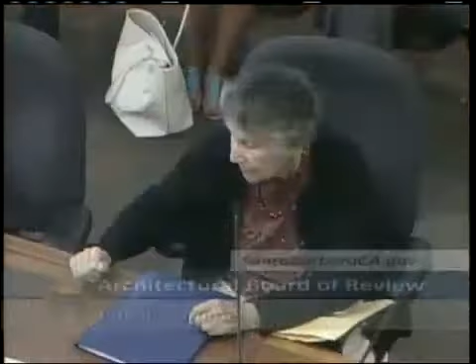Okay, thank you very much. Thanks for bringing in the examples especially. Would you like to keep those? You're welcome to, or I can take them away. I wouldn't mind keeping them personally. Do you mind? No, that's fine, I can always print out more. Thank you, Sheila, I'll keep it in my ABR binder. Thanks very much, Sheila. Should I fill out a form? No, we know who you are, we know where to find you.

We'll close public comment and go on to the approval of the minutes for the Architectural Board of Review for April 25th. We've reviewed all the items except for the last one, and we asked board members to review the video from that meeting to help us summarize the comments, because it's a large and important project, and there was some confusion in the minutes as written.

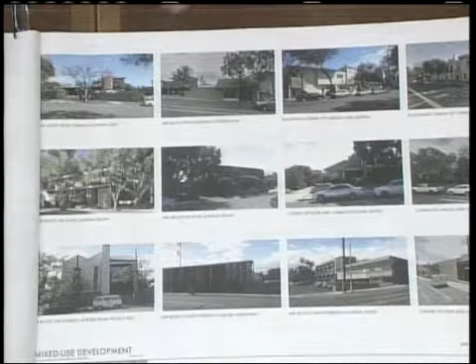We've got some adjacent photos - there's a project around the corner that we did, and several other photos of the block. Once again, this is that one block where if you really took a count of all the various types of architecture there, it's predominantly mid-century modern, including the old state building, which has the big parking lot beside it.

Just so you know, board members were requested to do a site visit before today's meeting. So you guys have been up there? Yeah, okay great. So here's the site plan.

The voluntary merger is to, this is all under one ownership now, but it's to eliminate this property line so that the whole thing will be one property, which allows us to use the entire site to project the density of the AUD units. This is the building that we're proposing to remove.

So we got to go to the site plan. That's the vet's office, is that correct? Right? Okay, correct.

So this is turned to fit on the sheet here, but anyway, so here's - oh yeah, I'm a little bit confused. Carrillo's right. Yeah, Carrillo. Let me go back to this other one.

This tells the story better. So there's about a story of level change across Carrillo right here, so that there's actually tuck under parking that you saw along this edge. So this is a surface parking lot that's up higher, and this will connect across the courtyard into this courtyard, which is the residential, where the residential units start.

If you go back under this driveway, you'll basically be going under a tunnel, if you will, over this courtyard down below to get back to the rear parking lot that's basically on grade.

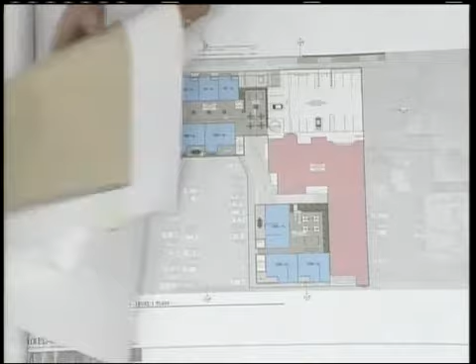And we are proposing a small commercial use right here on the street. It's just a little over 1,000 square feet.

So once again, this is up one level, and we have 3 studios here facing Carrillo, and then 2 one-bedrooms in the rear. And then after you go into this, you go tuck underneath there, and we've got 3 two-bedroom units on the one level above the podium. So we have a nice podium courtyard here, as well as here, that serves those units.

And the bicycle parking is back on the ground floor here. So when you come down underneath of this garage, you can come over here and get into a stacked bicycle parking. We have to have one bike parking space for every unit.

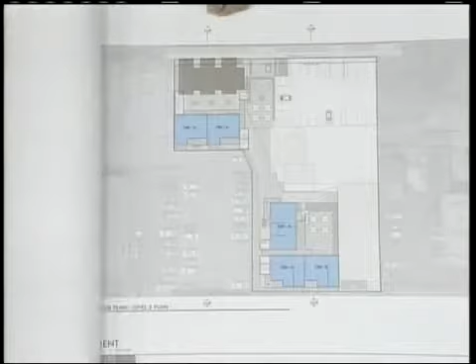Okay, so as you go up, there's 2 levels of studios on top of the commercial here on Carrillo. So this is 3 stories. When you get back to here, we've added one more level, so this is 3 stories on top of the garage.

But if you recall, that garage is almost like a subterranean garage here because it's one level down from this level. Back here in the very back part of the property, we're proposing to go 3 levels on top of the parking structure, so that this would be a total of 4 levels above grade in the back. And this is that big giant parking lot, the state building from Canon Perdido.

Yeah, this is the intermediate level below, and then this is the existing office building here, which is to remain.

This would be north, right? Correct. I just noticed it was labeled as a south courtyard on a previous page, wasn't sure why. Not a big deal, never mind. Yes, it's not real south, is it? It's a little more northwest.

So this gets up to the roof plans.

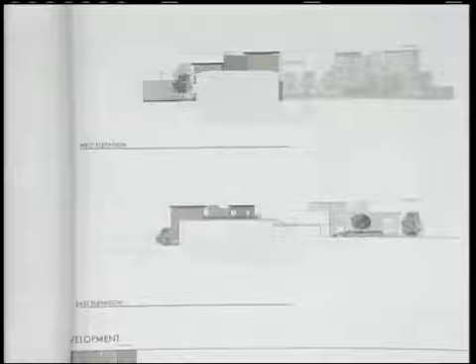The architectural approach was to do something very contextual with the existing building since we're very close to it. When we get through the materiality, you'll see we're proposing to skin the garages with a brick veneer so it's similar to the existing brick building. We're also introducing a heavy wood timbered roof on the uppermost portions. So brick around the base, then wood timber combined with plaster for the roofs. As with the other projects, it's much better to look at this three-dimensionally.

These are the sections. You can see we've got three levels over the garage back here, two on Carrillo, and three in the middle. The existing building is shown in white for massing, but you can see this one complex of units up front and another in the rear of the property, with the driveway tucking underneath that courtyard.

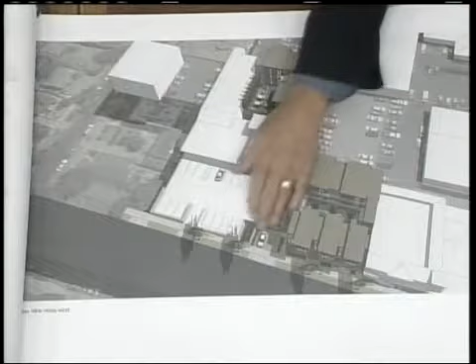That courtyard is basically level with this parking lot. We visualize it being used by both residents and people living in or working in the building—they can go out there and have lunch or whatever, with great views of the Riviera. So it's a combination mixed outdoor space.

This shows how the building is basically three stories at the front, but when it gets back in the middle, it steps up a story.

The street view: the existing surface parking has the Santa Barbara stone walls, which we're beginning to introduce down here around the front of our building as well, with brick on the lower podium portion and a combination of wood siding and plaster with heavy timber roofs. This portion back here is the four-story portion, while this is three stories on the street—it's the classic layer cake, taking the tallest portion of the building and pushing it into the middle of the site.

Here's a little closer view from the street.

Was that wood, the commercial space? Sorry, go back a second. The siding—I'm sorry, it's probably not wood, it's horizontal siding. It's either going to be wood or a Hardie siding of some sort. And this is an elevator? Correct, that's why it has the extra height—it needs to get up to this level and it has to have the overrun.

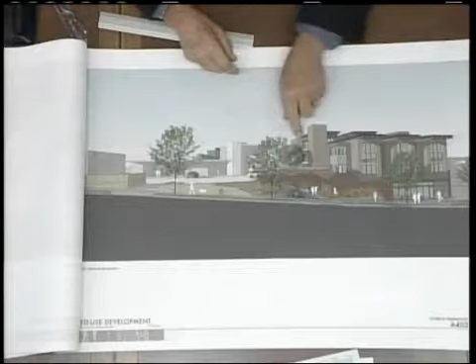With a combination of plaster, we may introduce some natural cedar on some of this too—we haven't finalized that decision, but we want it to be a textured, horizontal type siding. And this is plaster back here? Correct, painted plaster, and then the brick veneer on the base with the timber roof.

Just some more oblique aerial views, so you can get an idea how the massing works.

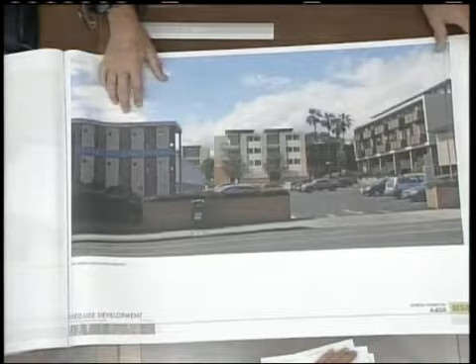We did a photo montage from Canon Perdido. This is the State of California building, here's the building on Hollis Street, and this is our proposed building—once again, that's set back probably 250 feet from the street.

Comments from the peanut gallery? I think so.

A view of the courtyard.

And this is the space that's between the units. So the units are accessed either from the courtyard or from these elevated terraces.

That's the small courtyard on the rear building, the one back in the middle of the site.

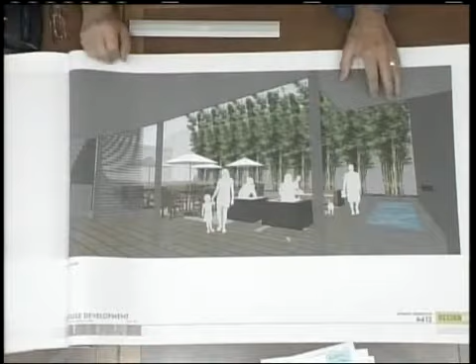Just have. Do you have any questions? Yeah, can I make a couple comments too? Yes, after your question.

Just one clarification - was there a view looking this way, showing this building in relation to the new one? I don't think we have one from that way, but we can certainly do that with a photo montage next time.

Mark, can you just go back to the street elevation on Carrillo? Let me give the board a bit of what we directed Mark on. We've been involved with this building since 1979, have owned it, and frankly many buildings adjacent to it and down the street. My dad bought that when I was 8 years old, and we've really studied and looked at this over the years many times. We kicked off an architectural design with Mark and another group just to find out how we could take that 420 building and see if we could match it to the best of our ability. That's a very important building for us.

It's funny, when we bought it in the 70s it was a happening place. Then it kind of died out in the 2000s. We've never changed any of the furniture in there, and now it's sort of architecturally relevant again. So for us, the direction from the family is to make sure we can bring apartments into downtown - that's important for us, and important on a personal level as well. And then also to do the best job we can tying in that 420 building.

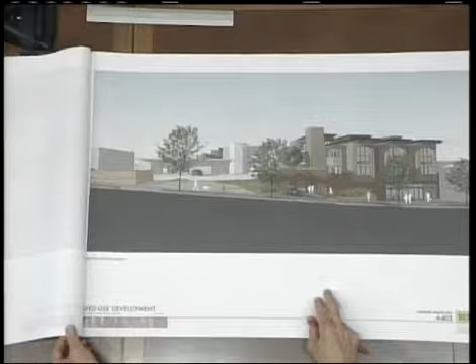I think the 414 building ultimately doesn't have the max opportunity there, but the 420 building - we studied back and forth many times taking it down, and there was no chance we're going to do that as a family. So that's really been our marching orders to the designers, to see how we could do that, and put it in a place that didn't have... there's other ways you could probably do this. From a design side, we've never developed in Santa Barbara. We've been in town for 4 generations now, and this is an attempt at the family coming in and trying to add some value in the area.

So when you mention 2 different buildings - 420, this is the yeah, 420, and this is the 414. Right. So the 420 is where I office, it's where we've had our company for 40 years. And it's important for us to try to take some of that material and be sensitive to roof peak heights, and pull it over to the apartment model.

So I wanted to say that in front of everyone - I think this isn't just a project for us, this is part of our life. Okay, thanks. You're welcome.

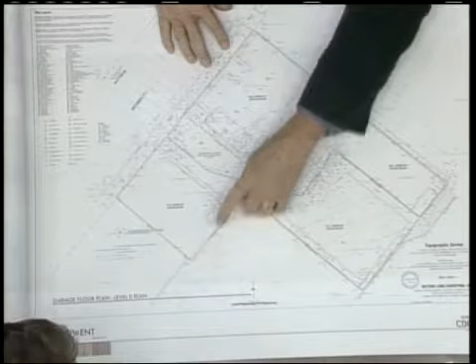And so the proposed finished floor for this, where does the finished floor relate to the grade here? Do you have a section through there? This is 33 here, and we're like 36.9 here, so there's an existing retaining wall, so we're like 3 or 4 feet above that. So the finished floor is proposed to be almost 37, and it's 33 and a half, so roughly 3.5 feet.

Okay, let's take a look at that back elevation real quick. The back elevation shown in the photo montage is this elevation, but you can't see it, it's hidden behind the State of California building here. The montage kind of shows it, so you can see some of that here.

I noticed in the 3D view there's a rather large brick wall back there. So this is at railing height at the top of that? And this is right on the property line.

Gotcha, okay. And there's a parking lot behind the State of California building, between these? Right, yeah. This is actually a parking lot that comes off of the next block over and comes down in between this building. This is kind of a flag lot, with most of this parking belonging to these buildings here.

And the finished floors of this garage and that garage are roughly the same? This one's actually down lower, because that driveway continues to drop as it goes to the back.

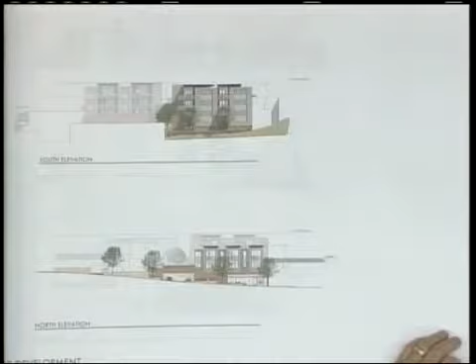And if you were to show a plate height from the finished floor of the garage up - we usually have about 11 feet of floor to floor on the garage to make sure you have enough to keep your plumbing through it and still have your 8'2" clearance for your van ADA parking. So above adjacent grade it's roughly 3.5 feet.

This has existing grade that's kind of dropping down. If we go to that photo montage that everybody likes so much - okay, so that's the building in the back. This is the building in question. And there's some landscaping between there, kind of a bank that comes down to the parking level.

And what would be the height of that wall if you just measured with a plumb line? Well, that's 3.5 feet above the floor, and that's probably another 10, so from grade it's probably in the neighborhood of 14 feet.

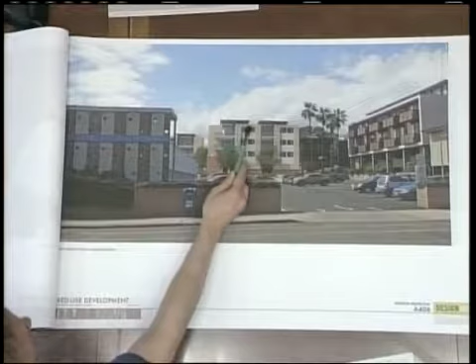Okay, I'm going to jump around a little bit here. The roofs - what's the logic there? Are those exposed glulam beams or heavy timber on the inside? Yes, and they're exposed - the insulation's all in the upper portion of the roof there?

Yeah, it's primarily over the living rooms. We're putting it over the living spaces. So the living space straddles... In this case there's a living room here and a bedroom next to it. So it's going to go over the living room and one bedroom, living room and one bedroom.

Got it. Just to give some articulation at the roof line. And then these are decks off the living spaces.

Okay, and then what's the plate height of the commercial space at the front? It's based on the same - we're not raising it any more than we have to for the garage. So this is going to be, from the finished floor of the garage to the finished floor of these first level units, roughly 11 feet.

Concrete podium construction? Yes, okay, 12-inch slab or so. And you need that much so that you can get your traps on your plumbing and your sprinkler pipes and so forth, and still have 8'2" clearance.

And then we're proposing 9-foot ceilings in the flats, roughly 10'3" floor to floor. That gives you enough to get all your soundproofing that you need between floors. Yeah, 10'3", and we've made it a little higher at those exposed timber roof lines.

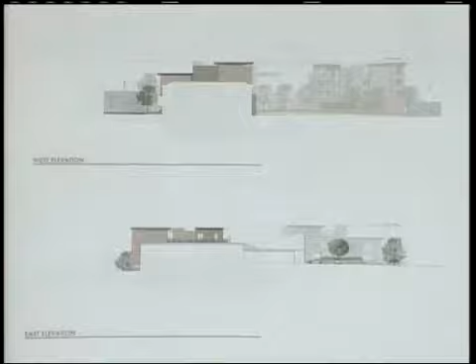Right, okay, those are all my questions. Thank you.

Kevin? Can we jump to the site plan real quick? This is kind of the composite plan. We can go to the level below - because this is up a level. This is up a level.

Questions about the commercial space - is there a use for that already, or what's the intent there? Just to have a mixed-use project? Well, yeah, it's a space we have available. We don't need to use it for parking, so we thought it'd be nice to have a small office. One time we talked about a little convenience store, but that seems to require a lot more parking, so we're probably not going to go there. Yeah, it's a 1,000-square-foot office - it's a lawyer's office.

Right, so if we go up from there, maybe it's best to look at that section. Where are we setting back from above that commercial space? As we move up in levels from there, how are we, as far as relationship to the street, set back as we move up? I don't think you do - I think it's right over the top.

Right, but this is a 5-foot setback to that, and then we're showing them cantilevering out 3 feet. Is that your question? Yeah, as we move up, I just wanted to. So if you wanted that, I think that shows best in the 3D view of the street view.

Like this one, this is a 5-foot setback, and these are sticking out a couple of feet. That's the commercial space. That's about the existing building height right there, I'd think. Roughly, yeah, the existing building is roughly that height. It's kind of a high-ish one-story building.

That's really all my questions. Okay, Howard? Could you please walk me through the vehicular entrance, parking, not parking, but circulation from West Carrillo? I'm a little confused as to how cars get in and out of the property. Okay, Mike, Howard, is your microphone on? Yes, but...

So essentially there's 2 driveways. What page are you on? I'm on 101, A101. This is the lower level.

So as we mentioned, the street is rising as it goes up towards Olive, so this is the lower driveway. It's the location of the existing driveway when you go in there right now, and it has tuck under parking along the whole left edge. In that existing situation, there's also perpendicular parking against the right side where the existing building is, so it's double loaded parking here currently. You continue and this drops down till you get to this lower lot in the back, so we're basically taking that lower lot and creating another garage there.

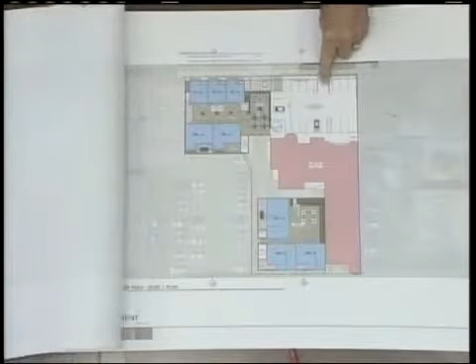Okay, then this one, you continue up Carrillo a little further. There's another driveway that goes into that existing surface lot, which stays pretty much like it is. I think we've restriped it a little bit, but it stays where it is. That's basically level, the same height as this deck here. So this is basically one floor above the parking down here, by one story. So you can actually park here and walk through this courtyard, into the stairs to go up to access these units.

Thank you, those are my questions. I'm going to have more questions, but I can't think of them all right now. Okay, well, thanks, probably all of us. What is the parking analysis? What is it that you're supposed to provide and what you're actually providing?

Well, the ordinance requires, it's really only related to the commercial space, and the ordinance requires 4 parking spaces per 1,000 square feet. I don't know whether you've ever done projects with a parking modification, but if you talk to Associated Transportation Engineers and look at the ITE standards across the country for office use, a professional office demand is 2.84 spaces per 1,000, as opposed to 4.

It's related to the commercial space. Right, and you're providing 2 instead of 4? Is that what you're providing? 2.84, so 2.8 instead of 4 spaces.

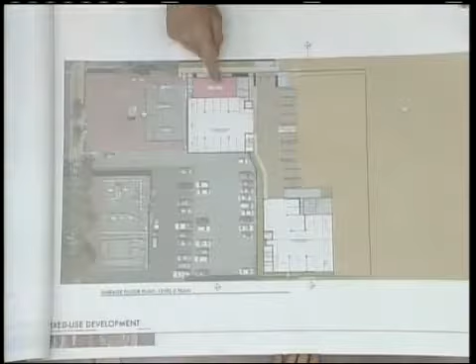Just further clarification, go ahead Howard. So the existing 11,700 square foot building, which is the Schmatt building, has its own parking. Yes. Is that parking proposed to be retained for that building? Well, the surface lot will be retained, plus the tuck under parking, which would also be used by the office. And then we're going to assign one parking space per unit for the residential units, and the balance will be available as shared parking.

But it sounds... go ahead. The 4,903 square foot building at 414 is being demolished. Where is its parking? Is there a credit there? What's that building, is that a commercial building? That parking goes away and gets replaced by the residential units with this 1,000 square foot.

So commercial building being replaced by residential. Correct, and a small amount of commercial also, which requires far less parking, one per unit versus four per 1,000 square feet. So the parking on this property, with the two properties merged, is at the same or less than what it is now, or is there more parking? There will be more parking, you said 40 goes to 57. Yes. So an increase of 17. Right, okay, thank you.

Since we are required to comment on the modification and its aesthetic impact, we kind of need to be clear about that.

Okay, so comments from the board. Scott? Let's start with that perspective along Carrillo Street.

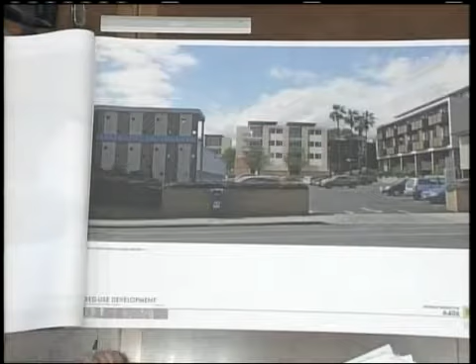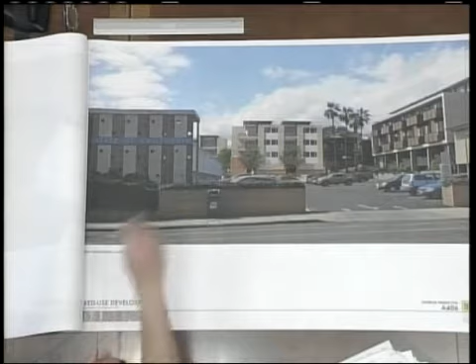Particularly this elevation, I find it unfortunate that there's added extra height between this grade and the finished floor, so it makes it feel unnaturally tall. I don't think the roof elements are enough to break down the boxiness of it. There's some clever things done to hide the fact that you have a large parking garage and you're above grade, bringing these down, but it doesn't feel nuanced enough or have enough articulation. It feels very tall and very boxy to my eye. This other elevation is less of a concern because it's really mid-block, interior. I know this is pushed way back, and I'm judging it just from this perspective, but it feels tall and boxy to my eye.

In terms of the overall massing of the project, I think there's some good things happening. Let's go back to, is there another 3D view? Kind of an overhead? I like the fact that many of the 4-story masses are interior to the block. That's kind of where they want to be. I don't think you'll perceive this as too tall coming from Carrillo.

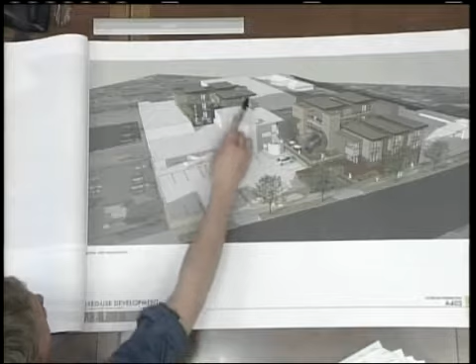This kind of 2-story brick wall, I know it's in the middle of a lot, in a parking lot, feels oppressively tall. Maybe there's a way to set that back and get some bamboo or what have you, breaking up the visual scale of that. Again, these 4-story elements I think are a big concern, and they're very, very far set back, but they do appear kind of boxy. This element I think is kind of a non-issue. It's really the height and boxiness of these, and then the brick and some of the detailing along Carrillo feel at odds to me. I like the fact that the courtyards connect and the notion of overflow parking.

Everything else, I think, has the potential of working. There's some elements that are problematic, very problematic, this back elevation in particular. Those are my comments.

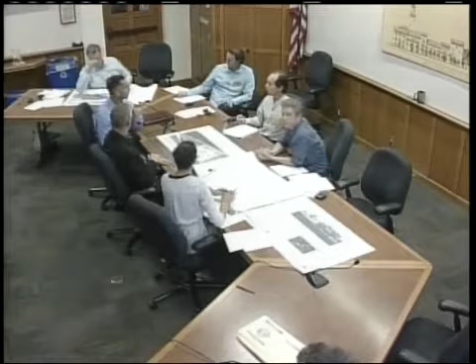Kevin, which elevation is that? Oh, East. We'll give you a chance to go through the comments. Sorry, Kevin.

I have a lot of very similar concerns as Scott did. My initial reaction, especially on the Carrillo elevation, is the brick—it's a big element in that elevation. I'm not sure it's the right material, especially in relationship to the sandstone walls you have going on there. That big, long expanse of brick isn't doing you any favors because it's just making the project seem larger and bigger and wider. So perhaps there's another way of handling that.

I asked earlier about the commercial space because it seems like it's about 1,000 square feet. It seems like that's also potentially driving the height of your building up, especially on Carrillo itself. So maybe there's a way to either reconfigure that, or maybe it's not worthwhile having in the project. Maybe that's an opportunity to bring some of the mass and scale down on the street.

Which was that? The commercial space. The commercial space. Oh, I see. Along Carrillo.

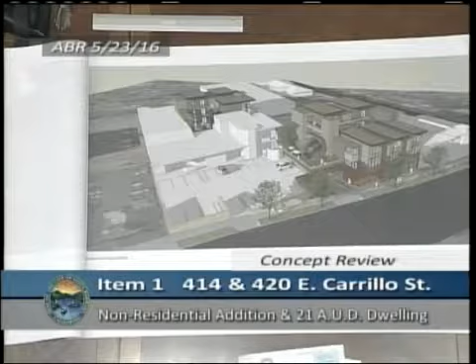I agree that the roof timbers are a little heavy, but one thought I had about this is that architecture has something—I thought when I saw this, San Francisco. It's what they're doing now in San Francisco, with the massing and the volumes and projected volumes and so forth. It sounds trite, but if you were to just make this all stucco and allow the projection of forms, the recession of forms, the reveals, and so forth to create shade and shadow, it would simplify it. It would be much more Santa Barbara, and you would still get the same building.

But I would invite you to study that. I know this may belong in some other place where you have more of a trend toward the modern, the more contemporary, like Upper State Street. But I think this might look very interesting if it was just fewer materials.

Howard. Okay, thanks, Howard. Well, I differ from most of those comments. I've always admired this brick and wood building in the back. I think it's a handsome building, and it has contemporary elements in its massing, but it also has very traditional elements with the brick and the wood, exposed wood beams and so on. To me, I felt like this is a nice way to pick up that theme and draw the corner together and create something that goes along with what I consider to be a nice building.

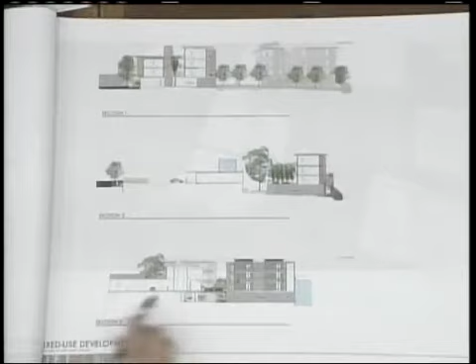Is the podium the same height throughout? The south podium is slightly lower than the one on Carrillo, but more or less similar, because there's a height limit based on the grade there, moving it up 45 feet. So it's pretty much fairly close, other than the one on Carrillo, which is down a story, while the others are more or less the same height as currently designed.

Kevin, do you want to add anything else to the motion? Does anyone else feel that, or am I the only one? I think you're alone on that issue.

And if you look at it from where the state building is. Sir, public comment is closed at the moment. Sorry, have some respect.

So your concern, Howard, is that it's too tall on the Canon Perdido side? Certainly on the Canon Perdido side, yes. I think the building height should be adjusted to follow contours instead of putting the higher building in the lower part just to fill up the site. I think it blocks views from other sites, and blocks views from within itself of surrounding areas. Views mean air and light and all the rest. So in terms of massing, this is going to be a highly dense, urban, almost urban experience. The idea of natural landscape is gone.

Question for the applicant quickly: what is the setback from the property line to the face of this building, or even the cantilevered portion? About 4 feet, maybe, it's on here. To the furthest back it's 6 feet, so about 5, 4.5 or something. There's no requirement there for setback, but we have it mostly pulled back so we can have windows on it, for the percentage of open, unprotected openings.

There's one more comment that was not addressed. I feel this architecture is appropriate for the corner of State and La Cumbre, where it's a freeway in and out of the city, a big gateway entrance. But this is really down, almost adjacent to the EPV, and there are a lot of Santa Barbara style buildings in the neighborhood, as well as craftsman and cottage style residential buildings. I'd like to ask the applicant to look at making this less like, what was the name of that part of Los Angeles that was mentioned? Culver City. Less Culver City, more Santa Barbara.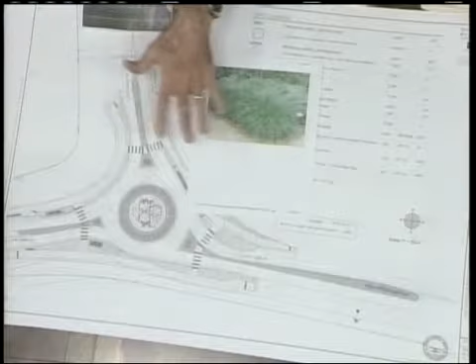Does that get irrigation? Yes, that's all part of it. This whole site is irrigated by reclaimed water, or will be. So because we're taking the asphalt out, we should have that look that we originally intended.

And then the other item that was requested was clarification on the transition areas between the sidewalk and the roadway, and I can point those out. The first location is here, where the sidewalk is ramping down to street level. This is a rendering that our designer put together, showing the multi-use path coming in from this direction toward the east, and then the bikes can ramp down to street level, tying in with the existing sidewalk that continues up Cliff Drive here.

And then on the other side over here, it similarly shows the ramp down to street level for bikes to enter onto the multi-use pathway.

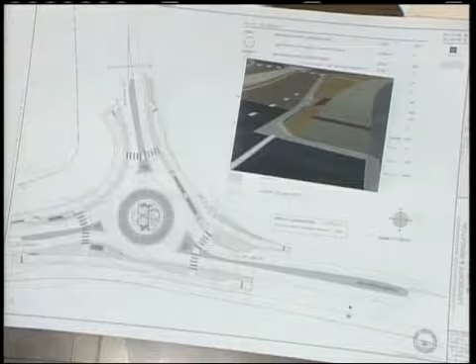Very colorful. And then I believe the last comment was about providing a dimension plan, and I have the full plan set here, which will get submitted.

I think one of the things we were concerned about was how it met the existing sidewalk and parkway condition. I guess that's illustrated, like almost a rolled curb. We're still not seeing that here. It looks like a chamfered curb. Blue curb with the yellow. Is it blue or shadow? Oh, it's a shadow. But I can pull up the construction plan.

So it's shown here with notes. And let's see, 14.

So this is the right way, this transition. This is the planting area. The rendering just doesn't represent how this is going to be landscaped. Gold is the new green.

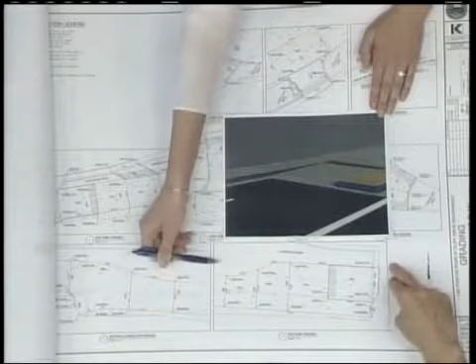So what's shown right here, is this street and asphalt curb? Correct, those are truncated domes. Yes, this is a bike path? Currently, yes, this is the existing curb face. Okay, so this is street, right, and there's a demarcated bike path that continues? Yes.

The on-street bike lane. Now I'm clear. Okay, thank you. Did you want to look at the other corner as well? No, no, that's good.

That's it, I believe that addresses all of the board's comments. Yeah, and the dimension plan that shows the widths of the units.

It's shown on various sheets. We have our line and curve sheet and table, and then we have cross sections. This is the full plan set. I know last time I had only brought the landscaping plans, so this is the full set.

Our grading plan shows all the details. Was there a particular area that you were interested in? Yeah, that's what we were looking for, is the medians.

That's the striping plan. It's going to be best shown on the cross sections. So for example, cross section F, we have multiple cross sections through each splitter, so through the ramp areas and then through the center of each splitter island, which are shown here. But the location of the cross-section is at a point where it's very thin.

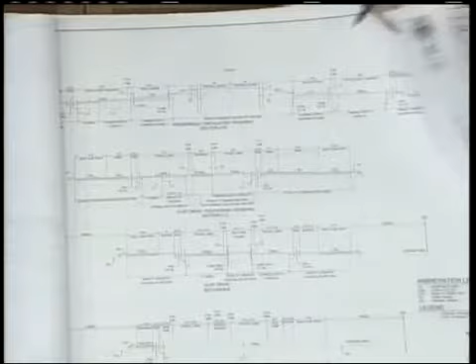We were more concerned about the bigger parts of the median. Do you have scale? I was going to say the big scale. Yeah, I meant to grab it off my desk, it's still sitting there. Engineering scale, please. 1 to 20.

David, what is the planting material that you're showing there? It's a sedge. Oh, you said that, I'm sorry.

How tall does that get? I'd say 12 to 18 inches. Which is under our 2-foot maximum for visibility.

David, what would you say the width of this planting is? What's remaining after the stones? Is it 3 feet? Well, you could scale that off too, but maybe 4 feet. It's pretty much drawn to scale, just where the planting is. That's 3, right there.

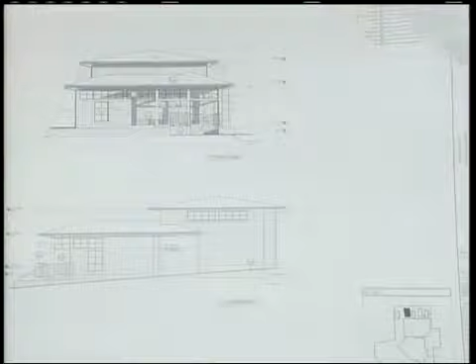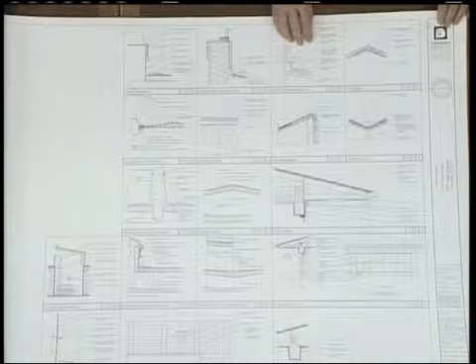Those are the same sections, and more sections, and details, and a lot of these you saw already. We brought these in early to show how we were putting especially the assembly of those clerestories to the doors and the factory mold condition. And also you've seen a lot of the eave detailing - we've got these very deep eaves that we're using with kind of a weave pattern on the corners with some slender little rafter tails, very delicate detailing. I think we developed this wood frieze around the porch element and have that all called out and sized - again showing what you'd seen in the model, but now been detailed. And pretty standard roof details.

The guardrail will be a wood guardrail that we're showing here with the little bases on the posts. And we are receiving the sandstone finish, so that is going to be clad in sandstone. Because we had to use concrete, we'll just have a little bit of a reveal of concrete that's colored. That's it - we didn't have a landscape plan for today, so at least just the architecture. So I think mostly it's everything you'd already seen.

Did you show us a lighting plan? Oh yeah, I'm sorry, the lights - thank you for saying that. I think we showed you the exterior lights.

We probably have it on us. So at this door is this fixture, and otherwise we're using recessed lighting into the ceiling here, so those aren't visible. And then the site walls, there's the walkways that have step lights set into the walls. And then there's a path that goes along here that will have little bollard types. These lights all match what's at the main cancer center building.

Do you have a drawing that shows the site walls and where those lights are? You'll find them on the E sheets. You want to find it? Sure.

Are there electrical meters, gas meters, and backflows located now that weren't before? Backflows are going to be out more street side. Electrical meter will be here, the gas meter will be right on here. And just one gas meter for the building? Mm-hmm. Where is the backflow on the site plan? Did we look at that last time?

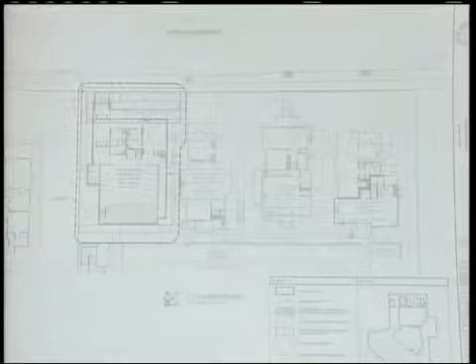No comments. Wasn't there comments about screening that? The backflow preventer, that one would be this. No, screening this - wasn't there a comment about screening that or not? I don't believe so. Actually there was - she had that hardscaped and needed to fix that, so she may need to come back unless she already did.

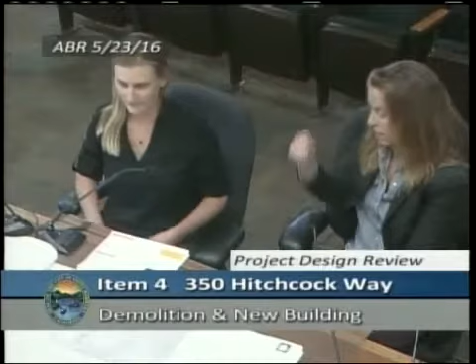All right, the backflow in the parkway - it's above grade, a little landscape backflow, is that right? For the landscape, this one is going to be connected to the main. The whole site will have one backflow preventer for landscape. And that's here in the parkway? I think you meant the meters in the parkway. Oh, the meters in the parkway, okay - not the backflow. Yeah, I thought you said the backflow.

Okay, we'll open up public comment. Seeing no one, we'll go to questions from the board. Howard, do you have any questions? No questions. Kevin? No questions. None from me either. And comments? I think it's ready.

Okay, any differing comments? Nope. Would you like to make a motion, Howard? I move for final approval as submitted, with compliments to the architects. Your mic is off - you got to say that on the record. That was off the record. Now I get a totally different comment. I move for final approval as submitted with compliments to the architect.

Okay, we need a seconder? I'll second. All in favor? Aye, aye. Motion carries. Thank you. All right, thank you, guys.

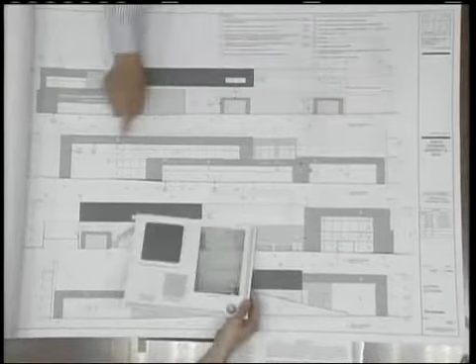Let's look at the elevations. Is that all elevations, or just the street elevations? The street elevation is predominantly the metal panel and glass. Can you show us that sheet, please. There's the front elevation, this is the material, and this is basically the glass. This is an opening, and this is the porte cochere.

I believe that is stucco, isn't it? This is stucco. The storefront mullions, what color? They're natural aluminum. Well, clear anodized is different than that color, right? Are they clear anodized? Clear anodized, okay.

So these are just kind of hidden joints, quarter-inch joints between this, there's no joint material in there. They're about 3/8 inch, for expansion in the sun. And then the backside, the expansion door, it all looks the same material, right? Yes, there's two different types of ACM. One is a wet seal where they'll shoot silicone in it. This is a dry system, so you don't get people putting their fingers in it and staining it over time. So it's just a dry, simple shingle system.

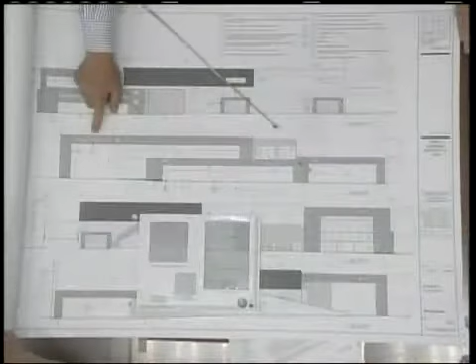And the text is white, is that right? To be honest, all I know is it's a plexi that goes into an aluminum can, and that'll be a separate permit. I'm not sure what the color face is at this time. I think we did it white just to contrast with the color.

Has anything changed since the last time we saw it, in terms of height or width or any aspect of it? There's only one change that we looked at. One of the comments was before that we had, I'll say, the backs of the building with white stucco and gray stucco. What we looked at going to was just a simple horizontal ribbed metal panel in lieu of the stucco, to give it more light and texture.

That was a comment from the design board. Basically, it would be this color right here, and we're looking at just a 2-inch rib, if that's acceptable, or we'll go back to stucco. A rib, meaning like corrugated? Corrugated, 2-inch, like a 2-inch face, 2-inch recess, 2-inch negative space.

Okay, let's look at that detail. That's more of a box rib. That's just the metal coming up to the stucco, so we've got it finished, there it is there. Or go back to stucco, but we were trying to look at your request of doing something a little bit different.

Do you have a detail where these panels turn the corner? Yeah, here's the details, horizontal, vertical, bottom. Nope, that's metal. Go back one sheet.

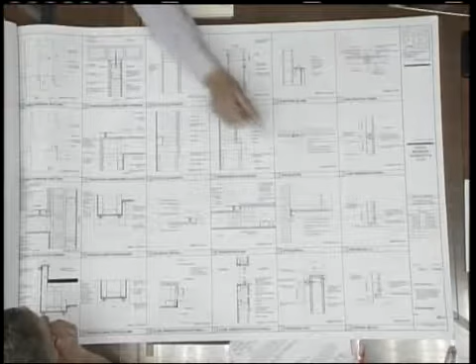Flooring details, and the parapet for it as well, or was that parapet cap? Parapet cap's right there, the way it's wrapping. And that cap is where you've got plaster, yeah, where we've got plaster, and that matches the rib metal. And that's just the rib metal. So there's your three parapet caps, there's the fourth. I don't see it turning the corner.

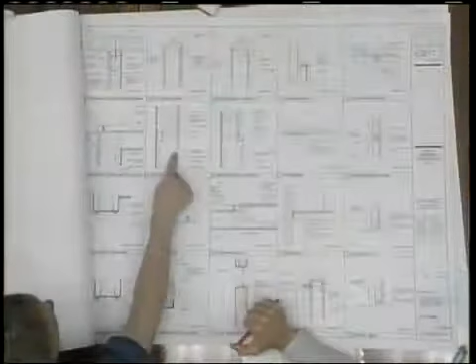So the ribs, actually that's right. We narrowed it up so that we could keep it all in plane. I was thinking it was the plaster overhangs beyond, is that right? Looks like it. Wood parapet, that's a special condition. Is the rib siding more costly than stucco? It actually is.

All right, so would someone like to make a motion?

Do you comment on the finish at all, other than we should be careful? Well, I don't think we've approved metal siding on any of these dealerships, and we've seen them coming back and fighting for it, and we've never approved it. So I don't know why we would make an exception on this very large building.

And I think if it was plaster, it would fit in with the other dealerships that are there. What's the detail between the plaster and the masonry? We're talking about the metal in the front, Howard. Talking about that metal. Yeah, I thought he was talking about rib metal.

No, I'm actually okay with the rib metal. To me, it seems like an industrial material, which for a car dealership, where cars are also being worked on, it works for me. And it's to the back, and it provides a nice visual change to that.

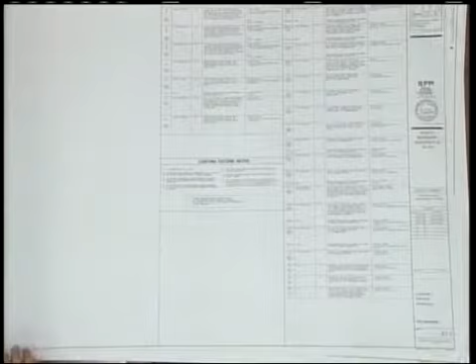I was looking at the prior stuff I had. The photometric should be in here. Is that the earlier stuff? A1.2, yeah, there's a photometric, A1.2.

Oh, it's A1 too. Yeah, we're curious what the pictures look like, the light poles and exterior lights and things like that. Oh, but here we go. Yeah, they're, okay, so the new lights are LED.

Just had LSI, brand new LSI ones put on other sites for demos just this week. So one of the typical requirements for final approval is that you have cut sheets of each of the fixtures proposed for the outside. Yeah, it looked like you had some under the canopies, continuous ones. Under the big canopies, they're basically just little rectilinear LED lights to give a nice bright light, and part of the problem is the one canopy is up very high and it's hard to get.

Most LEDs want to be 20 feet off the surface, we're up a little higher than that, so we had to find a special light to go on it. But I can bring the cut sheets, it's not, they're all spelled out in the set. I just didn't know I had to bring the cut sheets. Okay, that would be a concern to me, to have that big high canopy really intensely lit.

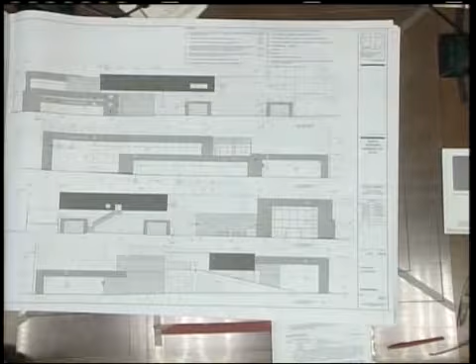Could I ask a couple quick questions so that I don't come back one more time? Sure. On the elevations, with regards to scoring, elegantly, emphasis on the elegantly, we would be starting by maybe putting them every other mullion. That's a good start. Do you want me to come back with a couple different scenarios and we pick one, would that be better? Well, I think if you carefully study it, I'm sure you'll come up with something that's going to work. Just we want it to make sense, proportion-wise, with the other elements on the building. I think, obviously, you're skilled at doing that, so what can I give you?

The biggest hurdle is going to be the finish. Perhaps you have a plasterer make up several versions of the finish you like, so that you don't have to come back multiple times to get it right. Okay, so you want a sample board with the plaster on it? I think it would be important, rather than just a chip that it's hard to get a sense of the actual finish. Okay, that's a good suggestion.

We could add it to the motion. Yeah, a sample would. Can we add that to the motion, please? To provide a sample of proposed finishes, and with the proposed color. Proposed finishes, samples of the proposed exterior finishes, and in the color proposed.

Mr. Chairman, is it appropriate to mention somebody locally who does that, does a very good job of that? You probably would appreciate it. Santa Barbara Plastering, Jaime Melgoza. He is a wizard with respect to plaster. Melgoza. And I think, what's his specialty, plastering? Does he work with Young Construction? Maybe, he's worked with everybody, but he's just really got three lifetimes of experience of stucco and finishing and additives and all kinds of things.

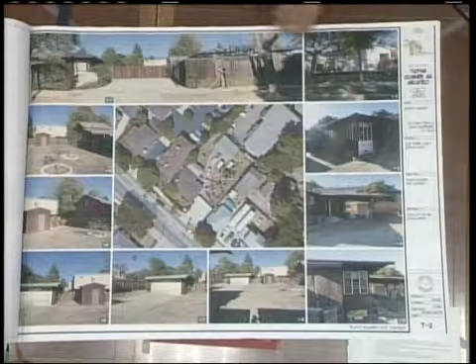I can cycle back to that perspective view because I think it shows some of the character-giving elements that was mentioned. Can we look at this just briefly, just to familiarize ourselves with the project again?

So these are some site photographs. The site is here. The photographs on this sheet are more of the immediate site, showing the existing single-family dwelling that's going to remain with some slight renovations. Also to note, these structures will be demolished, in addition to the shed roof here, which is going to be demolished.

Okay. The existing site fence here will remain. Actually, this is our site here. This is the neighbor. This is just to give some neighborhood context.

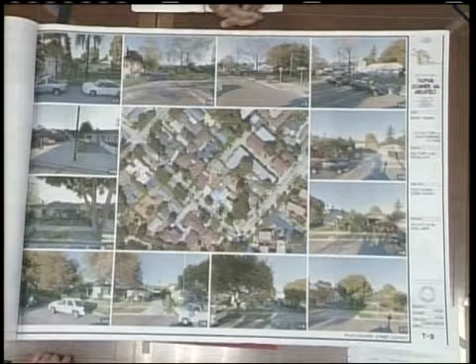So there is a precedent for California bungalow/craftsman style, as well as multi-family housing. There's some multi-unit duplex condominium style units here, and you can see that there is, like I said, a precedent for California bungalow, and that's really the architectural style that we're proposing.

Okay. So these drawings are new from last meeting, and for now I have just one landscape plan showing the overall scheme. I didn't go forward with the irrigation plan or the paving plan as such because I wanted to make sure that this scheme was in keeping with the board's comments before developing that further.

So if you like, I can go into the major changes in the site plan. That would be good. Okay. So previous to this scheme, we had proposed a common open area, which was located here. And the board's comments were that it was a little removed from the units and a little far from people that are going to be accessing that space.

The other comment was relating to the bike parking area. So in this scheme, we've taken an effort to locate the common open space central to the two buildings.

In doing so, we've had to rework some of the architecture. This exterior wall was going just straight across like this. We had to push these exterior walls back to allow for a 15 by 15 foot common open space. Okay, and I think it achieves that pretty well.

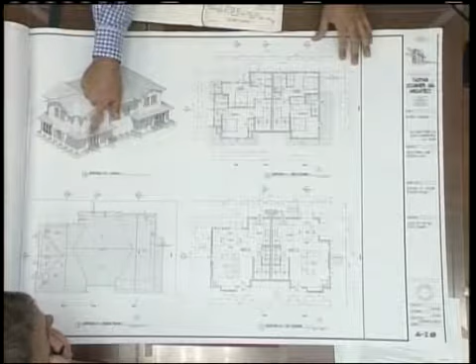We've also added bay windows, which you can see in the elevation, and in the 3D view here, they're architectural projections, so we're not violating the building separation of 10 feet. Okay, and we think that's in keeping with the comment to add some additional character-giving elements to the building.

Also, to note, we have added chimney stacks. Previously, we were suggesting horizontally vented fireplaces. Now we have these vertical elements, just in the front units. In the rear units, we've kept the horizontally vented gas fireplaces.

So that's really the major changes there. That's Unit A. Unit B, pretty much everything I just said applies to Unit B. We've set this area back to allow for the 15 by 15 foot open space. We also have a vertically vented chimney stack towards the front of the unit.

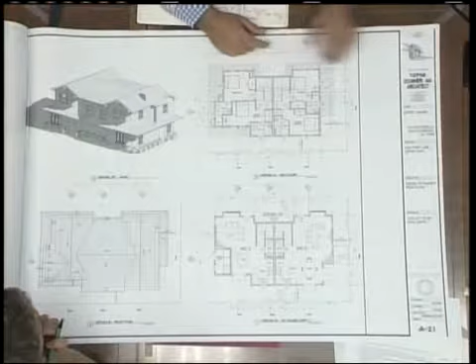And we also have the bay windows. Are the bay windows part of the previous design? They were not. Okay, so those are a new element.

Per the request of the board from the previous meeting, these are new elevations of the existing single-family residence. This elevation faces the new duplexes. We're taking down this existing trellis and proposing a new overhang above the new bike parking area.

It's sort of a California bungalow, with board and batten siding here, and stucco there, so it's all original. We hope to maintain the character of the neighborhood and rehab it as much as possible, but keep what is there to maintain the existing quality of the neighborhood.

What kind of windows? There's a mixture. These are actually fixed, and these are casement. They're wood windows, original wood windows.

I'm sorry, what page is that? A2.3. So I have a totally different plan here. Yeah, I apologize, this was a new set. Okay, so this is obsolete? Yes, better not be looking at that anymore. You want to come sit over here closer, Howard? I'll just stand, it's okay. So there we are, board and batten, I see it.

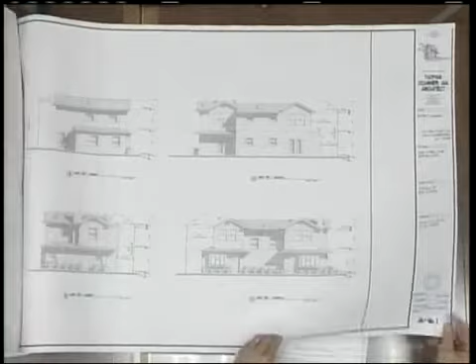Okay, so we'll open up public comment, and seeing no one, we'll go to questions from the board. Do you have any questions, Scott? Yeah, I do.

Let me go back to that original perspective. So I guess my question is, how essential is this bay window to the design? The reason I ask is it's starting to feel pretty pinched in between there, particularly with the overhangs. Were these overhangs part of the original thing we saw last time? The overhangs were, and actually those bays that come out don't protrude further than the planter below, so in terms of access we're not limiting the circulation. But I might be able to, I can see your point.

They're bay windows with a seat, right? Correct, no floor. And you got the bay windows back to back, 8 feet apart, which is... Right, they'll be 8 feet apart. Okay, just trying to understand that.

And the intent is that some of these have shutters, some don't. Is this the only one with shutters? There might be a couple more. Actually, thank you for reminding me, we had some single casement on the second floor with shutters next to the single window. I've replaced that with a double window to add more light, moving away from the shutter. We didn't like the shutter quite as much, so it remained in some areas.

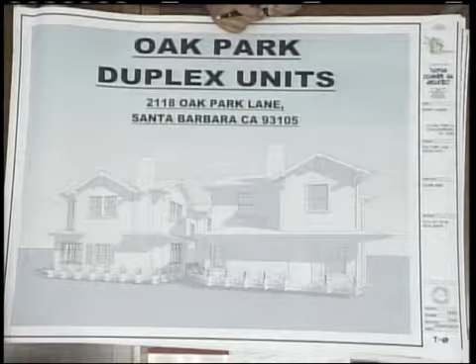What is that a door to? That's a door to the laundry room. A shared laundry room? Yes, a shared laundry room, and that was important to the client, that there was some laundry. It's not the largest laundry room, but there is laundry on site.

Okay, those are all my questions. Thanks. Okay, Kevin, do you have any questions? Yeah.

So over the little bay windows in the common area, you've got that eave running across there as well. How far out is that projecting? Is that another foot, 6 inches? Can we refer to the roof plan here? Yep.

I guess my dimensions somehow got lost, but I believe it was 18 to 24. And the tree you're showing in there, do you have a species yet? Yeah, I think the crabapple tree was something that was discussed.

We haven't fully developed the planting plan as such, but here's our general palette, some kind of flowering tree. We have the crabapple tree there. That's just, there's pavers all around it, and then the pavers stop where the tree well is? Correct.

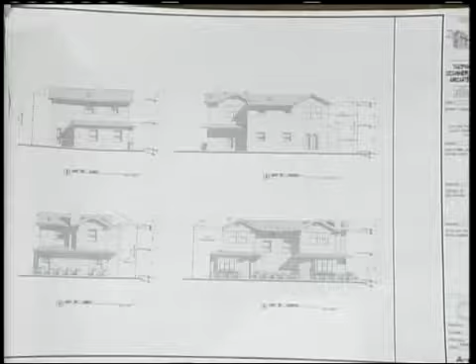That's half a comment, the distance between Howard and I. All right, so well, let's go into comments. Scott, that was my main comment, and just a quality of life issue. Oh, the comment about the proximity of the two bay windows. Maybe one side has a bay and one side doesn't.

And then just on the elevation or the perspective, it just feels tight. And maybe it's just a question of the overhang in that area. It's a nice device to break up the facade, but this area just feels like the buildings are getting too close together, kind of almost a Michelangelo photo there. So maybe there's a way to, maybe you don't do the overhang there, or maybe it's a small trellis that bridges the two, and then it doesn't feel like they have to be separate.

I think there may be a more elegant way to resolve that. And I think Kirk's point about the upper windows is valid. Short of that, it's a really nice project. It looks like it's going to be really well detailed, and I think the site planning is well done.

Kevin brought up a good point on the site plan about the backside of that trash area. I think that's where he was headed. Maybe that doesn't need to be a 6-foot wall here necessarily. I mean, it is reasonably set back from the site, so maybe it's okay, but perhaps that's something smaller and more open, less opaque.

So those would be my comments. I don't know if they could go smaller for the trash enclosure. Yeah, you had it reviewed by Karen Gumtow, right? Well, 5 feet is the minimum. 6 feet was the recommendation, I believe, for a site fence, for a perimeter site fence.

And what's the height of that one? 6 feet. Oh, okay. This doesn't really function as a perimeter, it's kind of a quasi-front yard fence. Okay, go down to 5 feet, I think would be good.

If you make any changes to the trash, you'll have to send a PDF to Karen. Make sure that happens before you come back here. Okay, thanks, that sounds good.

If he just changes the height of the fence, you wouldn't have to go back to her. But I guess, if you wanted this more open, was that your intent? I don't know, it just feels like an odd place for a 6-foot high fence. It feels less than inviting, kind of closed off, particularly when there's 4 units back here.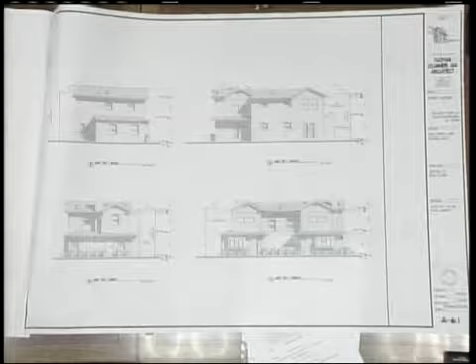But I think, in general, this sort of feels odd to me. It's this roof that's clipped onto the side of the building, doesn't have a relationship to anything else. We are limited in that we can't have posts coming down into the private open living space. We did have posts, and we're not able to do that, but your point's well taken.

That center space just feels really tight and cramped. I don't know if there's any other way you can give a little more breathing room. That would be nice.

Howard: I agree pretty much with what everyone else has said. I would offer one more suggestion, especially about the pedestrian entrance to your property. If you thought about putting the pedestrian entrance alongside the driveway, and having a wider space there, widening the gate opening so it's no longer a gate, and moving that other stuff into the side yard, planting the area that you now have as a sidewalk or walkway. So you come in the center and then branch out to your various spaces. I'd offer that.

I think somebody mentioned a trellis between the buildings. I think that's good instead of the roof. For example, those little bay windows that face each other should be as small as possible—just bay windows with little roofs. And that other roof element, which you have, which is effective, you could just make that a shed roof like the other side—stop, start. I think on the other side it turns a corner, but on this side it wouldn't turn a corner. Then add maybe a freestanding trellis that you would walk under going into that little inner sanctum there. That's not an entrance courtyard, is it?

Okay, so restudy the relationship between the carport roof and the garage roof. Yeah, this was an interesting one. I think we came up with a really good solution. Elevations would probably be best. So the challenge was we had to maintain a slope on the carport, but that slope line didn't really go with the rest of the buildings.

So what we did was we checked with Dan from transportation. He was okay with us removing the center post from the carport, and when we do that, that's also going to allow us to raise this end of the carport to give us a 2% angle, which is a lot less than it currently is. And then we were simply going to match the fascia with the rest of the house and have that actually horizontal, so we're going to cover that angle with a piece of fascia. That was our solution, so it'll have a straight horizontal line, it won't have that gentle slope look. I really think it helps to soften it, because before, the angle really didn't go with the rest of the angles.

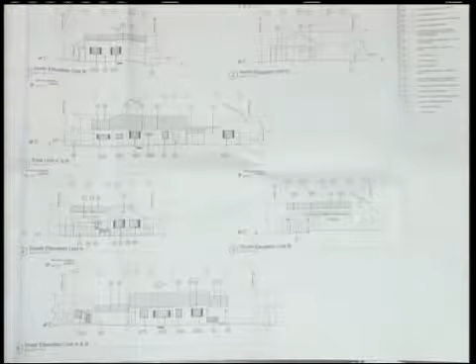Okay, number 3, clarify with transportation staff to study reducing the width of the driveway. Yeah, so I spoke with Dan about that, and the concern was trying to keep the citrus tree in the front and also adding some green space, and he is okay with us... let's see here, what do we have, what's the easiest one to see? Probably want to look at the landscape plan, is my guess.

A102, actually that's parking, I think this will be fine. So he was okay with us reducing the width of the driveway by 4.5 feet here, which will allow us to keep that orange tree, and it'll give us a 15.5-foot entrance into the property. Here at the carport, we're removing the center post, which is going to allow for a better door swing and allow us to have some green space. It's going to get thinner here towards the middle of the driveway, but we'll be able to have plantings the whole distance. He was fine with this.

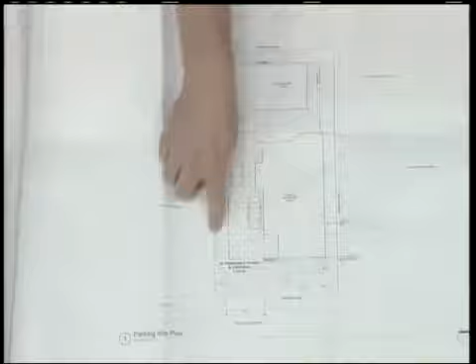Why would you bump out like this right in this area? Is there a reason it bumps out like that instead of just going straight? This was kind of in response to me asking him how wide can we go, and he was just concerned with maneuverability. He clarified with me that it was okay at the carport to go to the pillars, but I was left with the impression he wanted a little bit of a wider berth for a car backing out. That may have been a misunderstanding on my part.

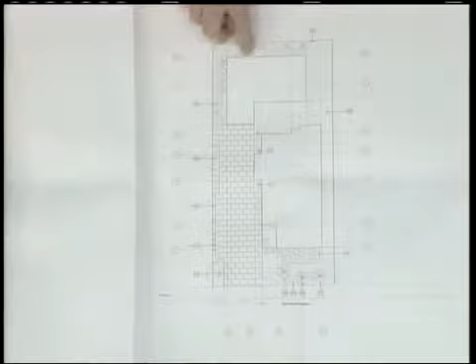Number 4, provide landscape plan. Basically, we're keeping the citrus tree and adding plantings. In the corners of this bump out in the house, we're leaving space open so we can have lavender, some drought tolerant buffer, and a flagstone pathway that leads to a flagstone patio, spotted with different drought tolerant plants, some succulents and things like that.

On the front here, the front of the house is private outdoor space, a flagstone patio, and then we call out the smaller maple trees. I think we have a coral bark and a Japanese maple, to get some shade. Those are proposed, not existing - we just like the way they look, and for privacy since that's going to be a bedroom.

Are we missing a key for the call-outs, or is there a key somewhere? Yeah, it didn't print, it just didn't show up. I'll have to reprint that.

Let's see here - study the relief from the paving and the edges along the property line, especially along the house, even if only a small buffer area along the property line, such as an in-grade planter buffer between the... I think you've already covered that. Yeah, we have to.

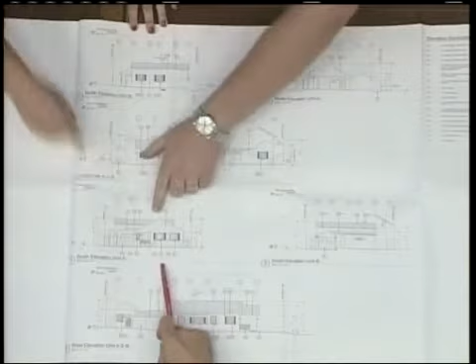Study providing charm-giving cottage elements such as wood siding instead of stucco, craftsman, including shutters and wainscoting. So we've looked into a bunch of different options there, and to get that feel, one of the big changes we made - if you look at the elevations here, from the front of the house, that would be here. So we've moved the front door, so the front door is now facing the street, and this allows us to have a much more craftsman feel. We're going to have a nice wood door here.

We've added the shutters around the windows facing the street. There's a little bit of a graphical issue there, but it's just supposed to be that style door - this door here will be the same as the front door, and then the wood posting around the patio. We're adding lighting here, craftsman style lights both to the garage and to the front of the house, and that will match the same light at the entrance to the second unit and the back of the property.

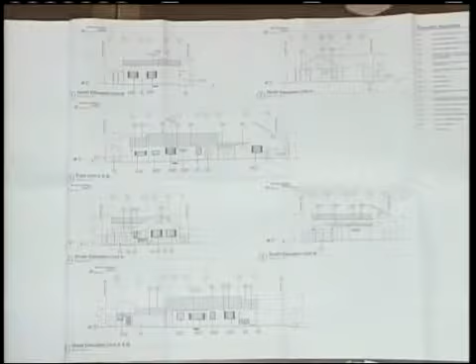Also, on the side of the house, the ones visible from the street, we will add the shutters too. We did look into different finishes - we originally called out stucco, and we did look at some others. For financial reasons if nothing else, and we also like the look of it, we'd like to stick with stucco if the board would allow, but we did look at some other options as well. And we want to do the smooth face stucco, not smooth plaster.

So, is this enough of an overhang over that door to protect the door? That's a good question. Is that roof edge - which overhangs then, the front door at the street? I'm just wondering if there's enough of an overhang there on the right. It's about 18 inches currently. Because that's existing, okay, well, we'll talk about that.

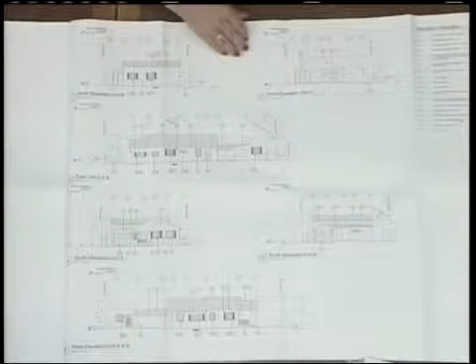Study the uniformity of the window treatments, provide details. That can come later, it doesn't have to be in this set if you don't have it. We did do just kind of a typical window treatment, because we want to do some kind of wood trim around the windows to accent it, and then we'd just have the stucco come right up to it. Since some of the windows are going to remain existing, it's hard to set some of them in more without having to move all of them, but I think the wood will attach to the framing, and then we'll do the stucco up to that - it should frame it really nicely. And then with the added shutters on some of them as well.

Provide exterior lighting details. I just have a printout, I may have taken that too literally, but this is the lighting that we were going to use. These are the ones we want to use. Currently we have two of those, so we'd like to reuse them and then continue.

Hardscape details - just showing the typical paving, because we would have 2x3 pavers, and then we want to fill it with DG in between, and then they'd have to put some sand and gravel down to let the water percolate. Then flagstone for the walkway and for the two patios. The walkway will be naturally spaced flagstone, and the patios will be on a cement slab.

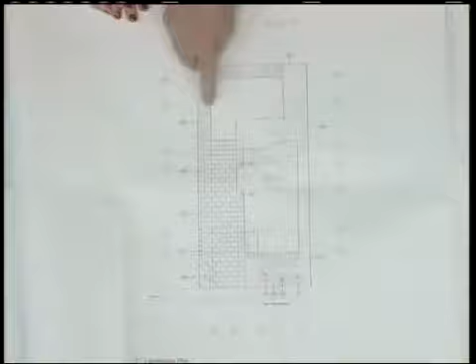Study to define the entrance to the second rear unit with a pathway. Site plan, or even elevation might be good to show, but we added a nicer walkway here before - this was just solid, we didn't have anything. Adding the landing for the door, more dense here, and then at the entry, which is down there.

We experimented with an overhang over the door, but it seemed like it would feel too tight, so what we did was add a more craftsman style door. Lighting right back here, and I think the window was there before, but we initially put in a door with some side lights - but once you look at the interior space, the actual door swing would take up the majority of the usable interior space.

So what's inside here? That's actually the existing garage. Okay, that's why the plate height is so low.

I think that's it. So we'll open public comment. Seeing no one, we'll go to questions from the board. Howard, do you have any questions?

What is the plate height of the existing carport - the garage - that you are keeping? Currently, I'm wondering if it's called out on the elevations. I think we would be lifting it up 2 feet. I think he's asking about the garage, not the roof - he wants to know the plate height at the garage, not the carport.

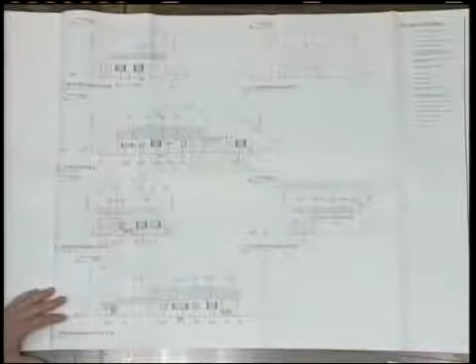Well, if it's over - I noticed that the ground steps down here from the backyard. Correct, it steps down almost a foot, 11 inches. The side of the property where the entrance for the secondary unit is, is at that lower elevation, and the opposite side of the garage is higher. So if it's low on the low elevation, it's even lower toward the backyard. The west elevation is the lowest side, and the east elevation is the higher side.

Okay, so what is the carport roof made of? Right now it doesn't have a roof, but we want to match the roof of the house. Asphalt shingles, the shingle roof. So what about the flat part, the carport? Yeah, there's no roof currently - it looks to me like it's a flat roof.

Well, they flattened it out - it's flat, it's dead flat, not pitched. Well, it's because there's a fascia piece that you're seeing right there, but behind it would be a 2% slope - the fascia is hiding the slope. We were trying to get it so it didn't look so funny, because before it sloped much more. That's not gonna work that way, you'll see - you get into the depth of your pieces and the slope, this is gonna get bigger, the fascia is gonna get bigger.

Just curious, okay? Other questions? That's all the questions I have. Okay, Kevin? No questions. Okay.

Scott? Is there a reason why this plate is so high on the little addition? It looks like it's up at about 11 feet or so. We just wanted a larger ceiling height inside. Because we're restricted to the square footage, having a taller ceiling makes it feel more open.

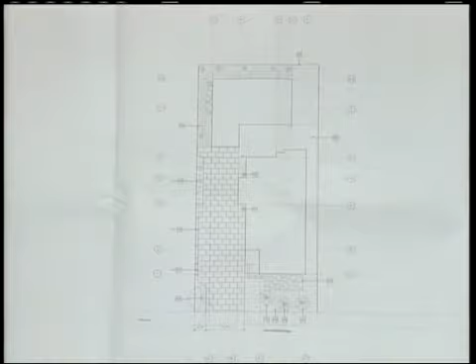And I agree the front door could use a little cover over the top of it. And other than that, I wish there's a way to get a little bit more landscape buffer along the driveway. It seems tight already - you're parking right up against the house as is. It seems like there's an opportunity to get a little bit more landscape in there, so you can get something a little bit bigger, more scale.

You're gonna be limited to what you've got there, maybe vines or whatever. But that's it. Okay, agree with all the comments about the front door, the side yard, landscaping. And then the proportions of this side and this side, they look a little almost dollhouse-like. It's something to do with the height of the roof. It's very odd looking, and maybe that's easily remedied by lowering the plate height, say, a foot. In a very small space and a very high plate, sometimes it almost feels like a well. It's not necessarily a positive thing.

So, lower the plate height of what? The unit in the back. But I mean, I think it has potential to be a kind of cute addition. You can particularly see it here in this elevation. It feels ungainly high compared to the existing garage, which has a rather low plate height. Those are my comments. Thank you.

Now, I see what you did with the carport roof, and I guess it's okay. But as Howard was saying, with the framing members that you need to span this length, they're going to be at least a 2x10 if you don't use timbers, and even 4x10. That's still quite a long span. So then to hide it with a fascia, you're sloping 1/4 inch per foot just to get the water out. So you're going to need a fascia that's 14, 16 inches high to hide that.

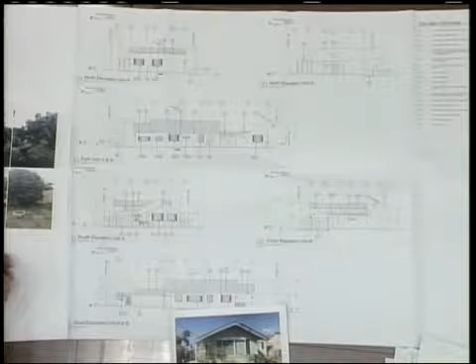Are all the windows vinyl in the building? Except for some older aluminum frame, single pane, single hung - those are the ones we're replacing. So we couldn't talk you into metal clad wood sash? Maybe if we're replacing all of them.

Here's the other thing about my comment on the overhang at the front doors - it looks to me like it's at least 18 inches. Yeah, I think it is. That seems plenty deep to cover a door there, so I cancel my comment. That was a question comment I brought up, it's not in a motion yet.

Howard did make that comment though, so who would like to make a motion then? Sure, I'll make a motion - just add one other thing. We looked at this last time and didn't have a problem with the height in the back. This is the first time I've seen it. This was just two weeks ago, and if we were going to comment on that we should have made it last time. But if everyone likes it the way it is, then let's not - I'm okay with it. I decided last time I was okay with that height.

Howard and Kevin, are you guys okay with the height of the unit in the back, plate height? I agree, it's a strange proportion there. Same comment about centering this window - these two are pushing right to the edge, you've got like a stud and a trim piece. I'd think about lowering that so the low slope and high slope come off each other. On the other hand, it's not affecting anyone - as you can see from the photographs, you won't be able to see it from the street, it's not an intrusion on the neighbors.